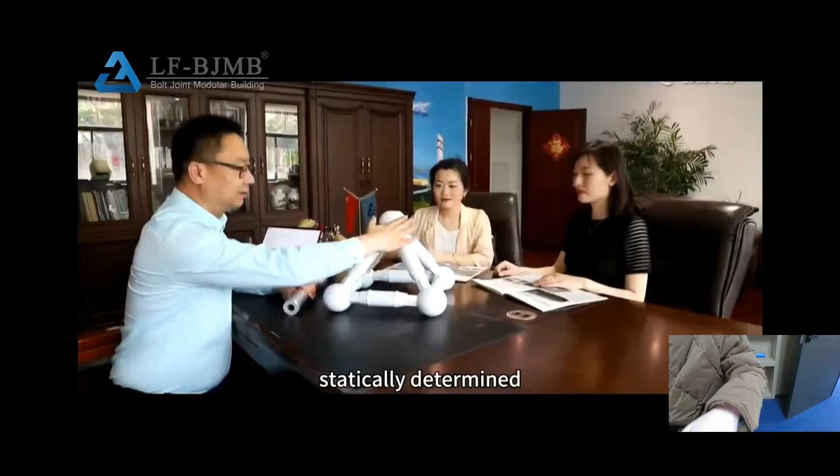Xuzhou LF specializes in serving overseas markets. The customers served are distributed in the Americas, Asia, Africa, Australia, and Europe. Overseas customers and projects include ThyssenKrupp, the Presidential Office of African Countries, the world's largest churches in Nigeria, Philippines SM, Shell Petroleum, Japan Mitsubishi, and BASF.

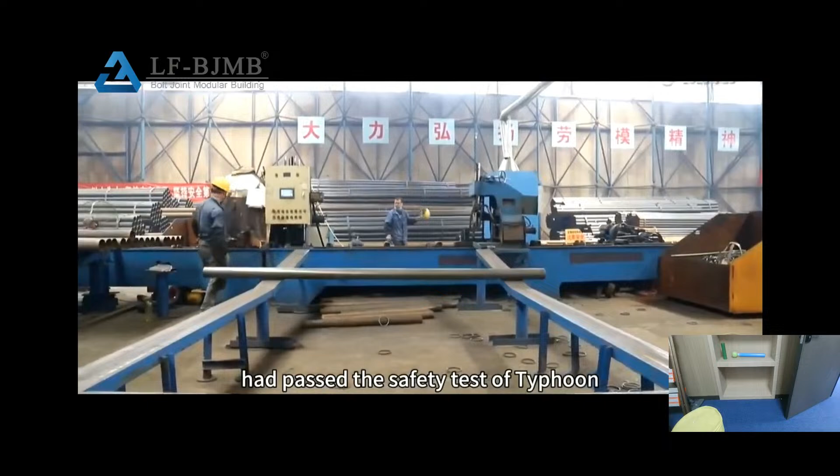Many large span coal sheds constructed by LF had passed the safety test of Typhoon Haiyan in the Philippines in 2013. LF has been carrying out technological development and R&D of steel structures and space frame with many patents.

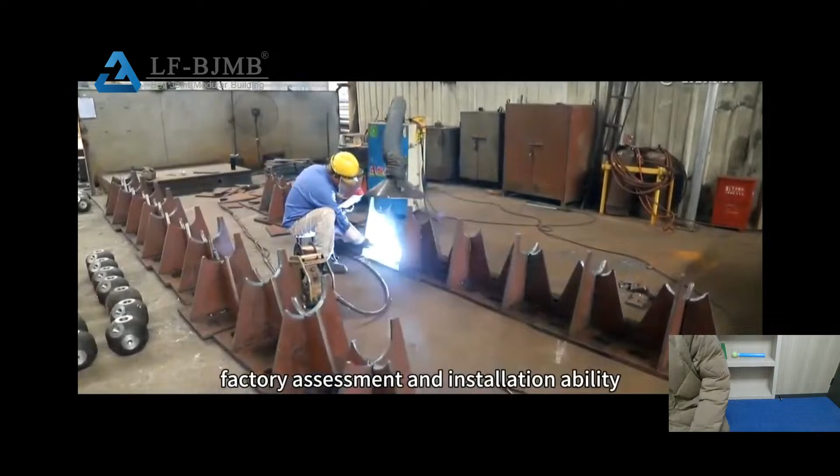LF has also been approved by some institutions like BV, SGS, AWS for manufacturing welding, technical assessment, international experience, factory assessment, and installation ability. It is recognized by Alibaba as a Strategic Cooperative Enterprise and Gold Seller for the Overseas Market.

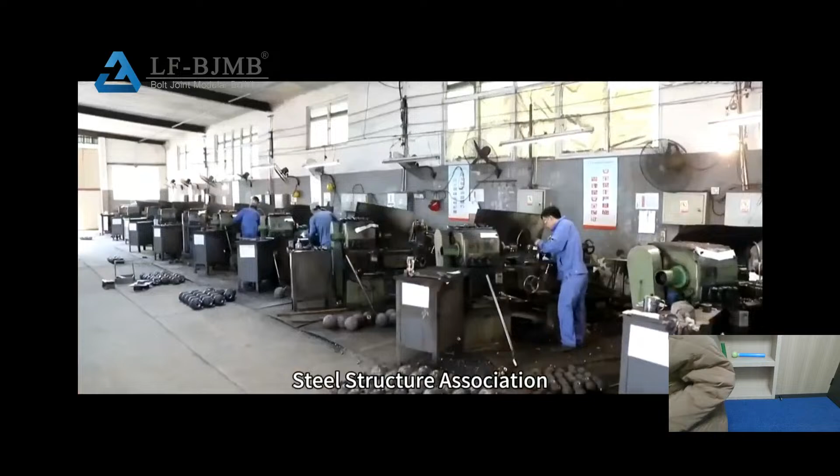LF also serves as board member of the China Steel Structure Association, vice chairman of Xuzhou Cross-Border Chamber of Commerce, vice chairman of Shenzhen Chamber of Commerce, and holds other social positions, leading Chinese companies to overseas markets.

The mission of LF is to make itself a respected leader in the steel structure industry, and let the customer choose LF without regret.

Now let's have a tour of our factory.

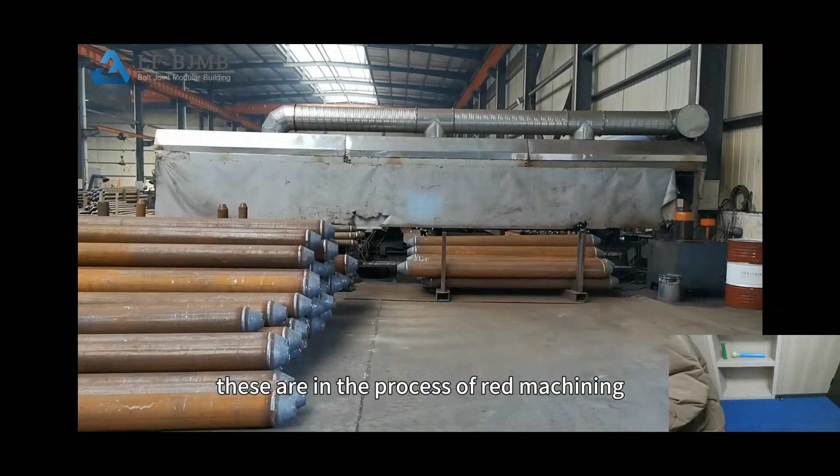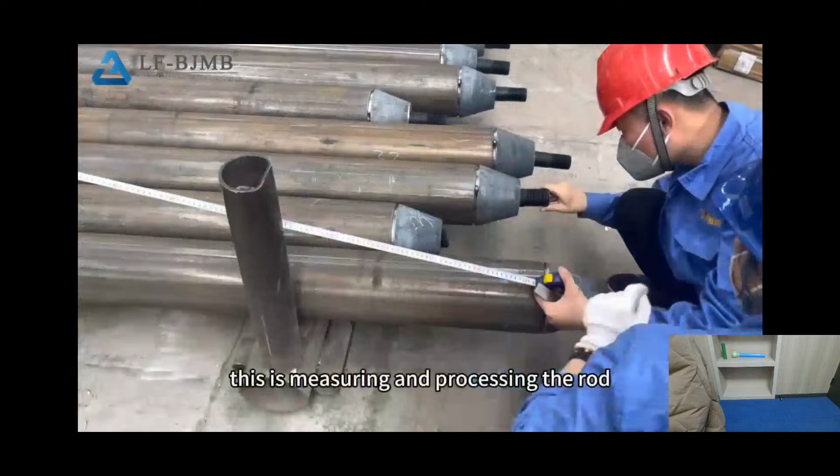These are in the process of red machining. This is measuring and processing the rod. Our process is strict to ensure the fastest speed to achieve the best quality.

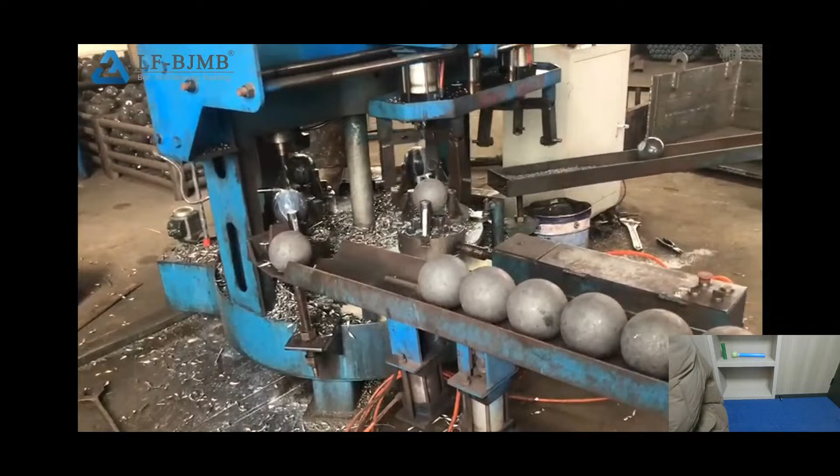Drill a base hole for the bolt ball. Then the bolt ball is machinized.

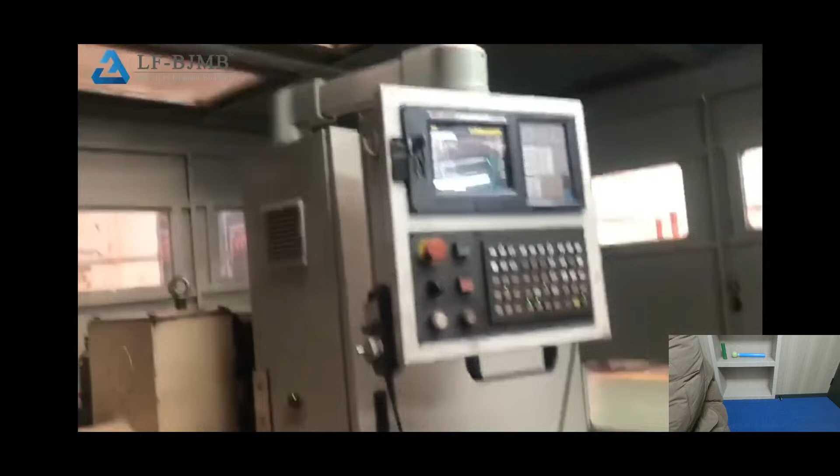The bolt ball is solid and the weight is very heavy, needing to be placed on the support with the aid of tools.

The bolt balls are sprayed with zinc to prevent corrosion.

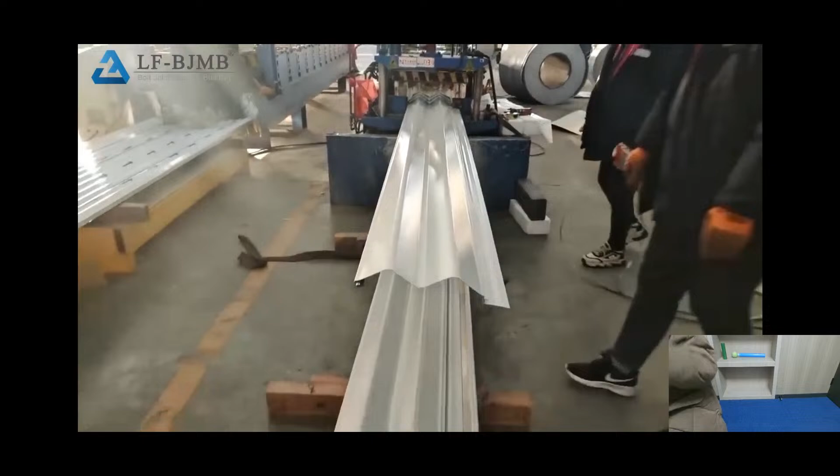This is dealing with sandwich panels. The process in our factory is orderly, fast, and quality guaranteed.

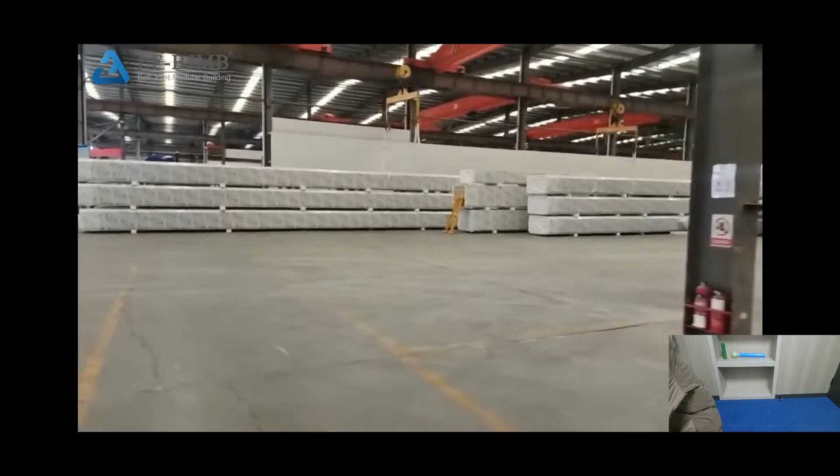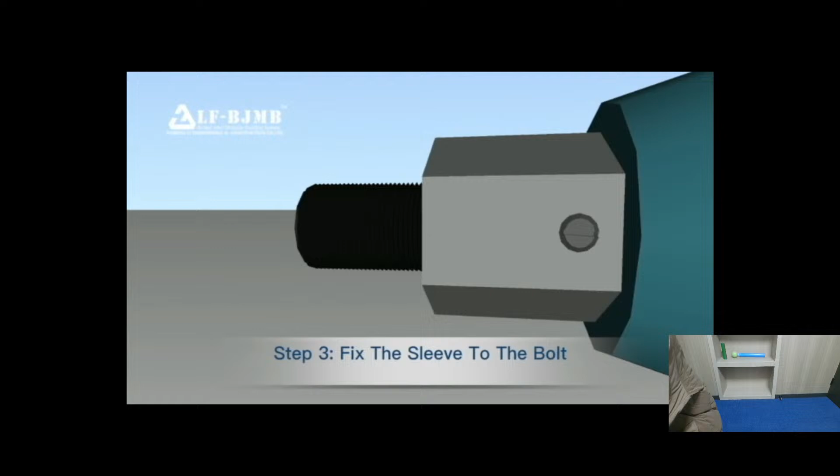This is followed by the space frame component assembly. Step 1: Put bolts into the pipe. Step 2: Fasten the pin to the sleeve. Step 3: Fix the sleeve to the bolt. Step 4: Connect the pipe to the ball by fastening the bolt. Step 5: Assemble the space frame module.

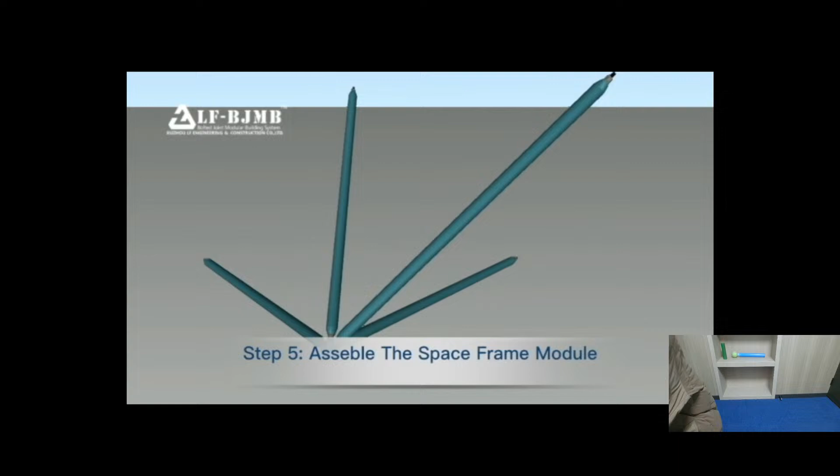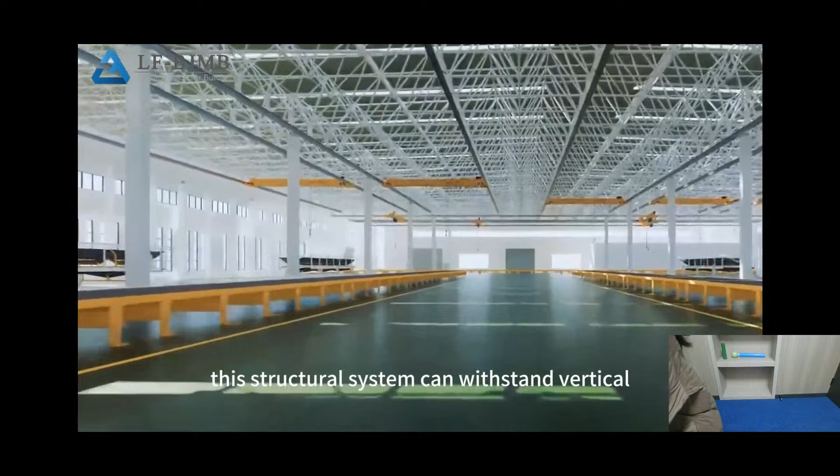The main structure of the space frame structure workshop is mainly composed of columns and beams connected through nodes to form a stable load-bearing system. This structural system can withstand vertical and horizontal loads, and the wall is not load-bearing, mainly playing the role of enclosure and separation.

A barrel shell is a shell with a barrel-shaped appearance or barrel-shaped structure. Shell is a kind of structural form with curved shape and thickness much smaller than other dimensions, which can bear large loads and has good stability.

This is the dome space frame structure coal bunker installation display. Dome coal bunker is mostly used in vertical large capacity coal bunker, and its structure can disperse the pressure evenly, so the stress performance is better.

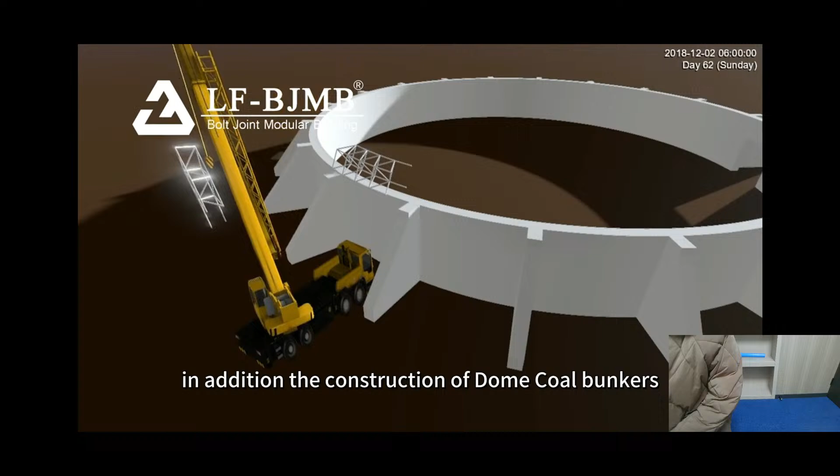The design of dome coal bunker makes full use of its internal space, with high section utilization rate, which can store more coal. In addition, the construction of dome coal bunkers is relatively simple, and due to its structural characteristics, it is also easier to maintain.

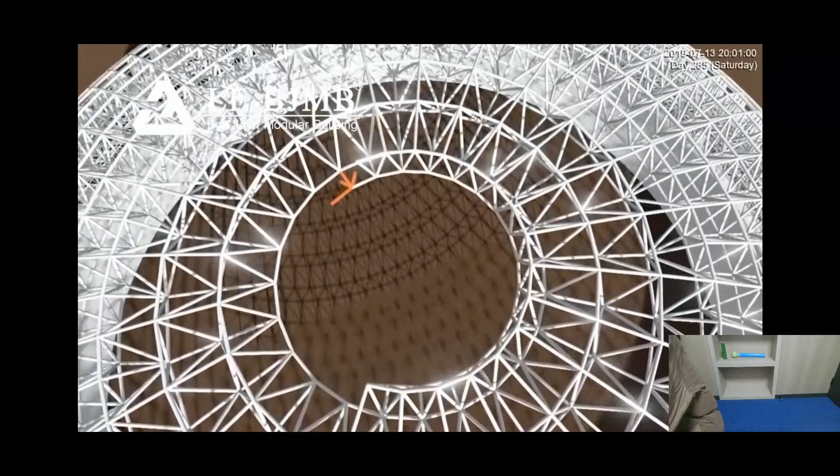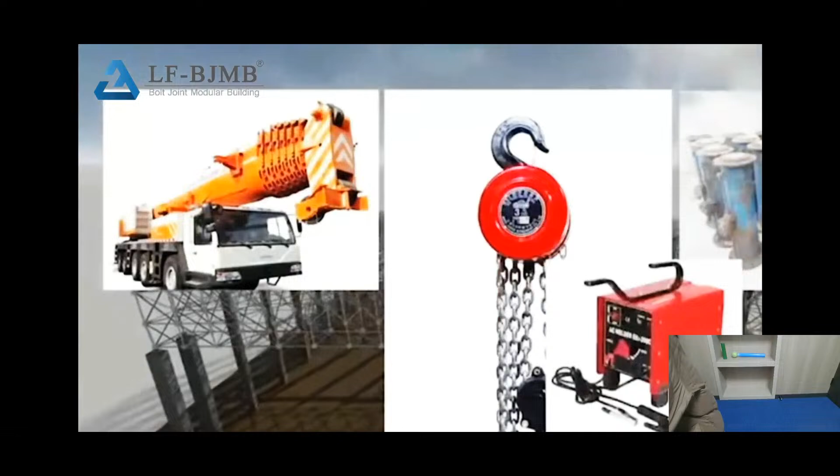This is the hangar space frame construction simulation BIM, showing main construction materials and construction quality specification.

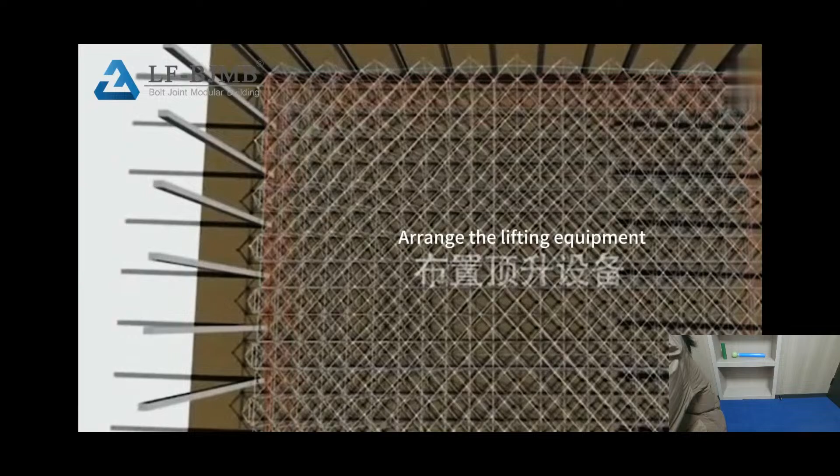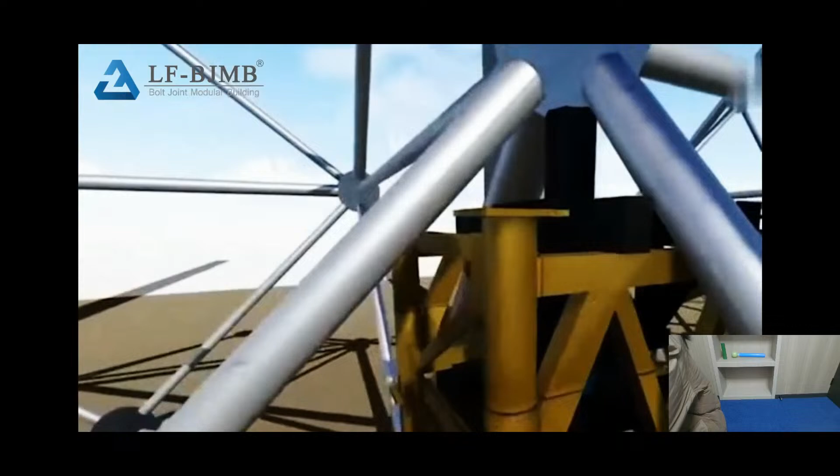Arrange the lifting equipment. Test lift work. Lift. Formal jacking.

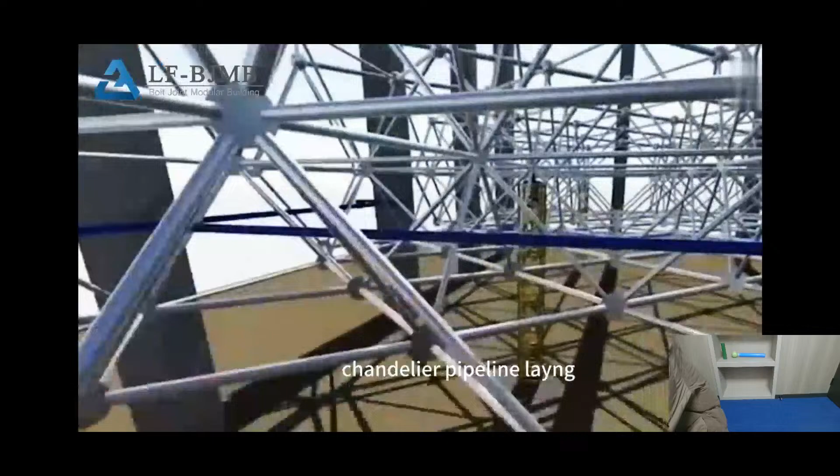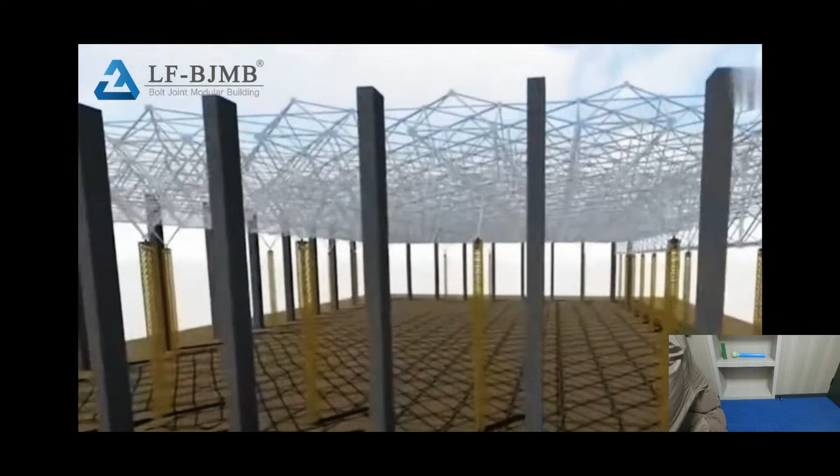Chandelier pipeline laying. Point of observation. Hangar space frame lift description.

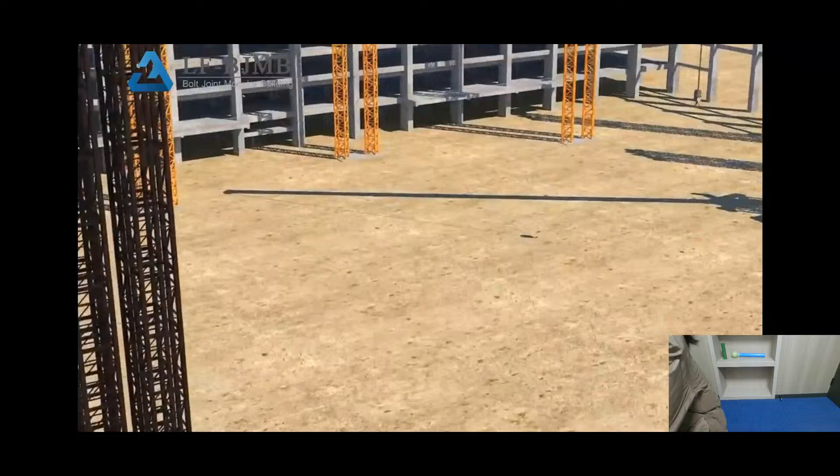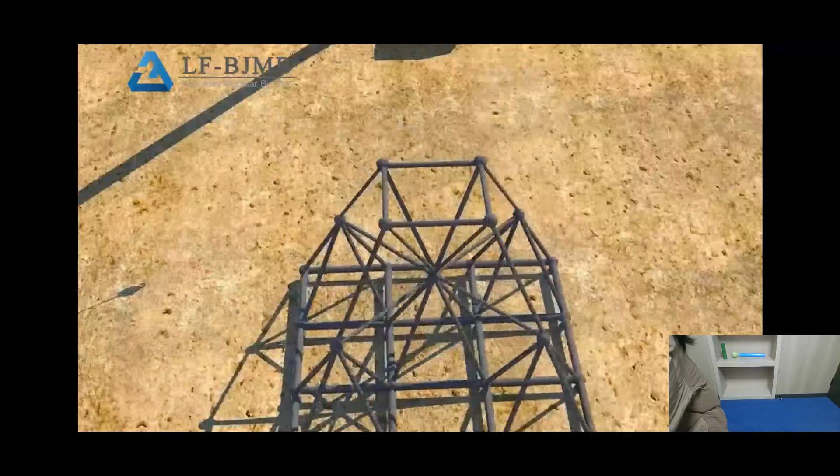Ground space frame assembly steps. Water and electricity installation, roof main purlin installation. Door head guide structure installation.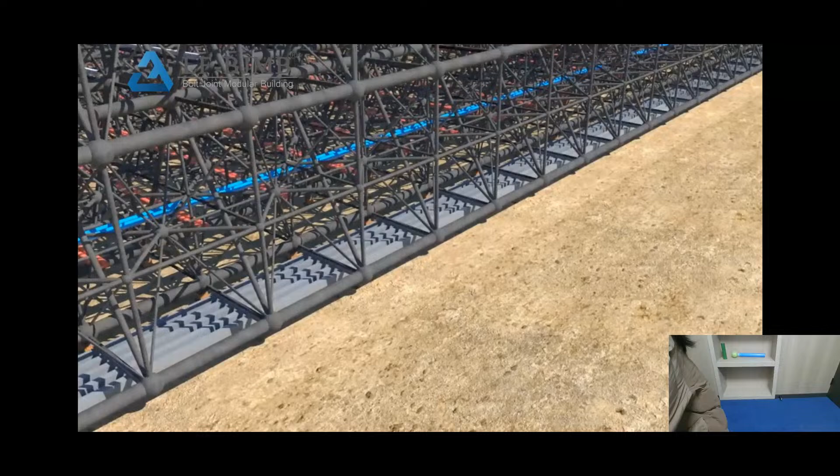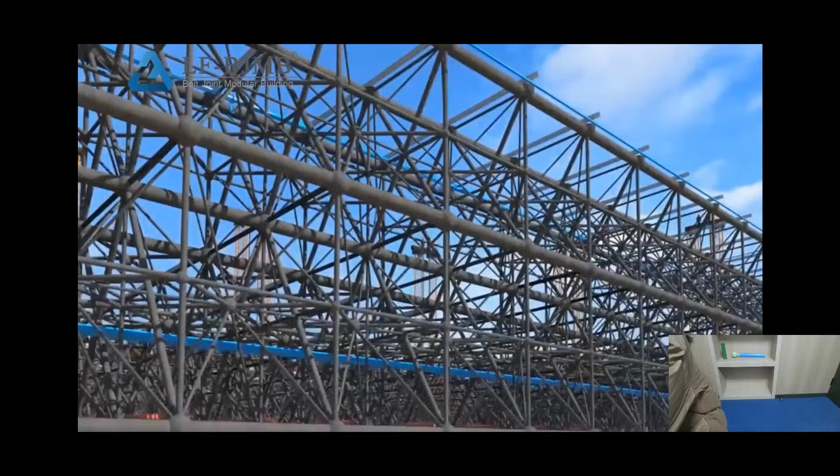3D laser scanning. Space framework pre-elevation. The space frame is officially lifting.

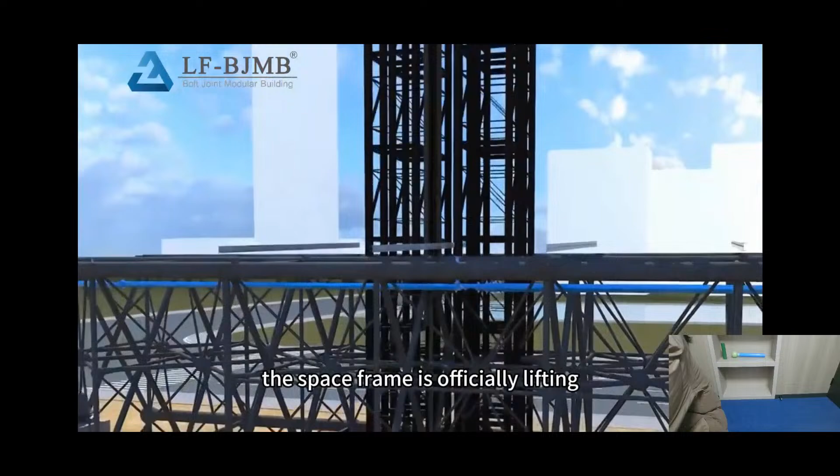Close-up bracket. Installation of horse path. Space frame disassembly.

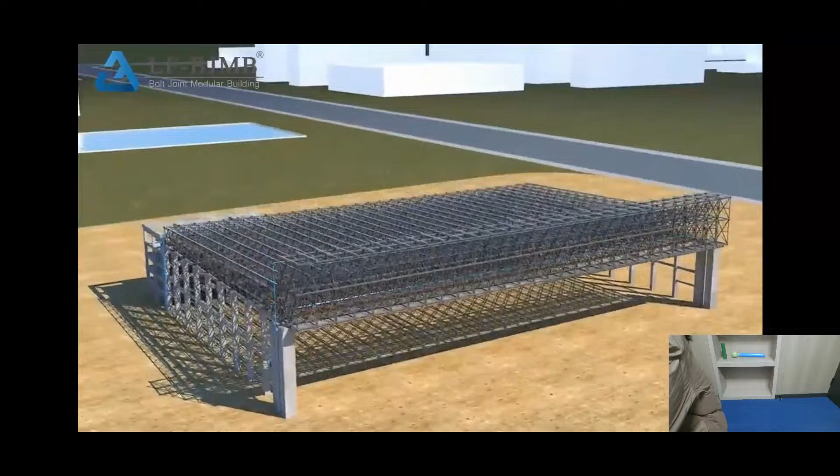This is a demonstration of the gas station shed roof installation process.

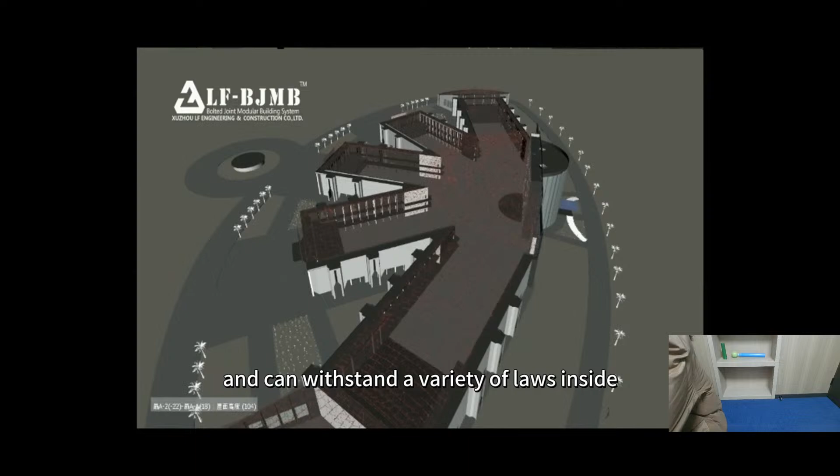The spatial framework of the cathedral is made of high-strength, corrosion-resistant steel. The steel has excellent mechanical properties and durability and can withstand a variety of loads inside and outside the cathedral, including spectator loads, wind loads, snow loads, etc.

At the same time, the plasticity and workability of steel also enable the spatial frame structure of the cathedral to achieve a variety of complex shapes and details.

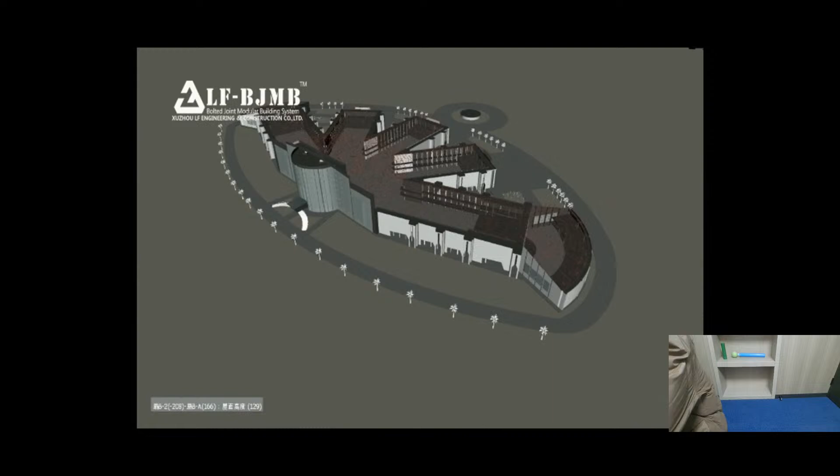The design of the space frame structure of the cathedral fully considers the safety, stability, and economy of the structure. Through accurate calculation and analysis, the designer determined a reasonable structural arrangement and component size to ensure the stability and safety of the cathedral under various loads.

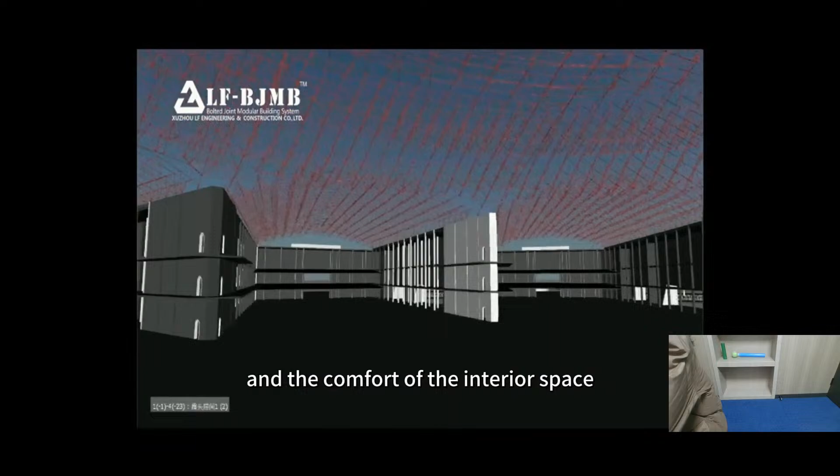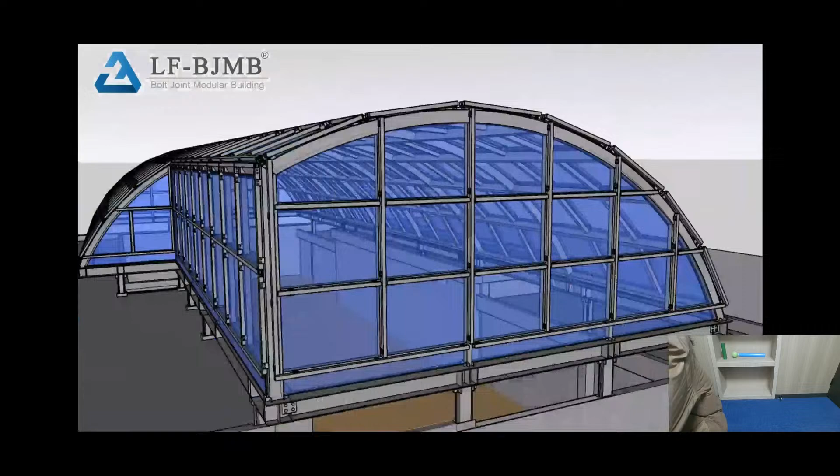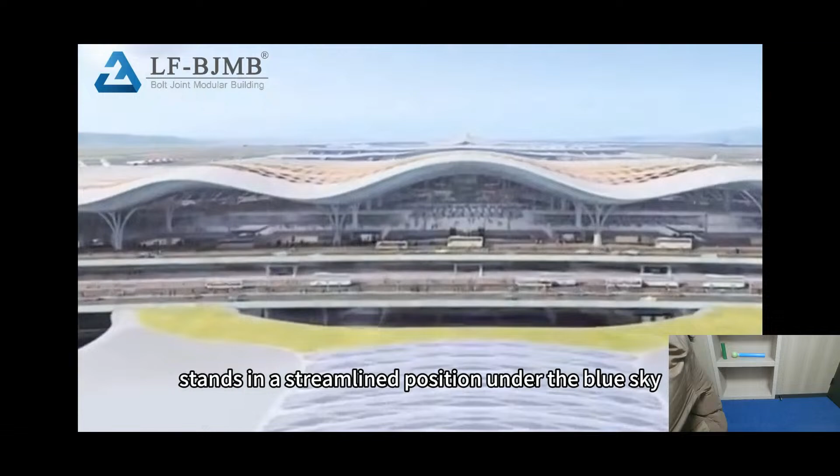The first thing you see is a spectacular panorama of an international airport in Yunnan province. The design of the terminal combines modern and traditional elements and stands in a streamlined position under the blue sky, like a phoenix with wings ready to fly, symbolizing the hospitality of the people of Yunnan and the infinite hope for the future.

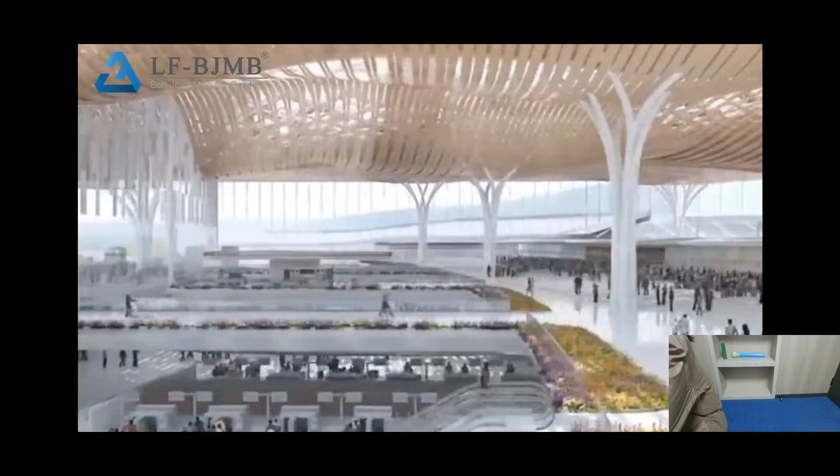Entering the interior of the terminal, a spacious and bright hall with a reasonable layout is displayed in front of you. The interior decoration is cleverly integrated into the ethnic customs of Yunnan. From murals to sculptures, every detail tells the story of the land.

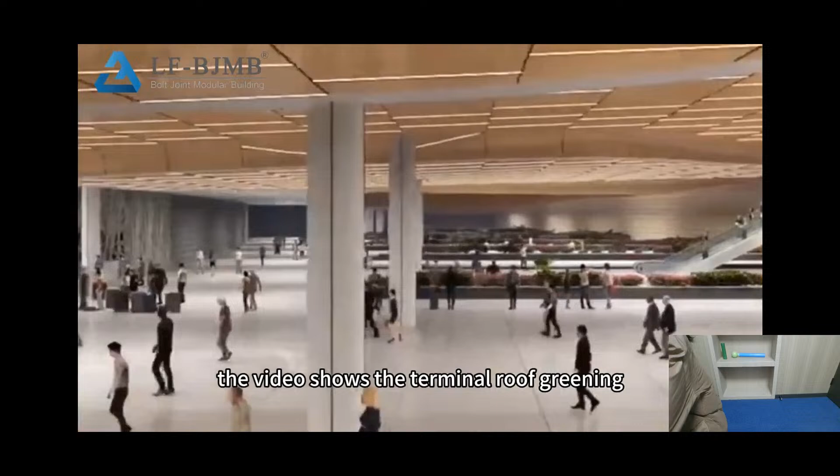Yunnan Airport terminal design pays special attention to green environmental protection. The video shows the terminal roof greening, rainwater recycling system, and energy-saving lighting measures, which not only beautify the environment but also effectively reduce energy consumption.

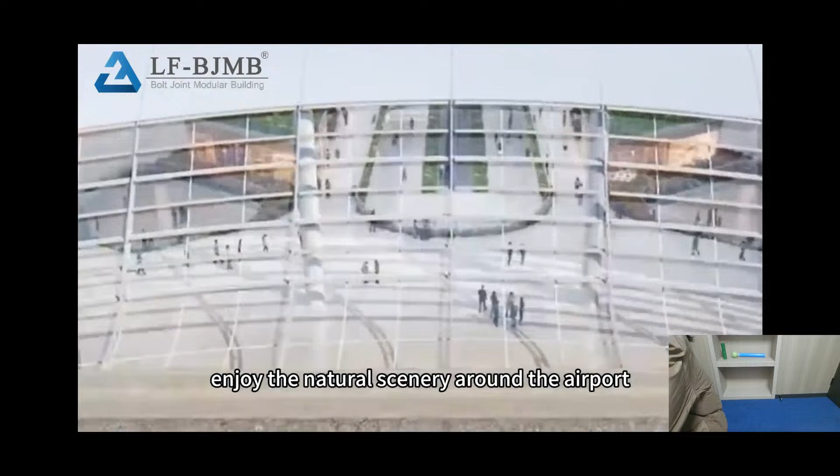Through the huge floor-to-ceiling windows, passengers can also enjoy the natural scenery around the airport, as if they are in a moving landscape painting. The lower structure of the terminal adopts a reinforced concrete frame structure.

The roof and supporting roof structure are hyperboloid shaped, and the quadrangle pyramidal space frame structure is adopted. The supporting structure of the roof is steel ribbon, conical steel pipe column, and variable section box swing column.

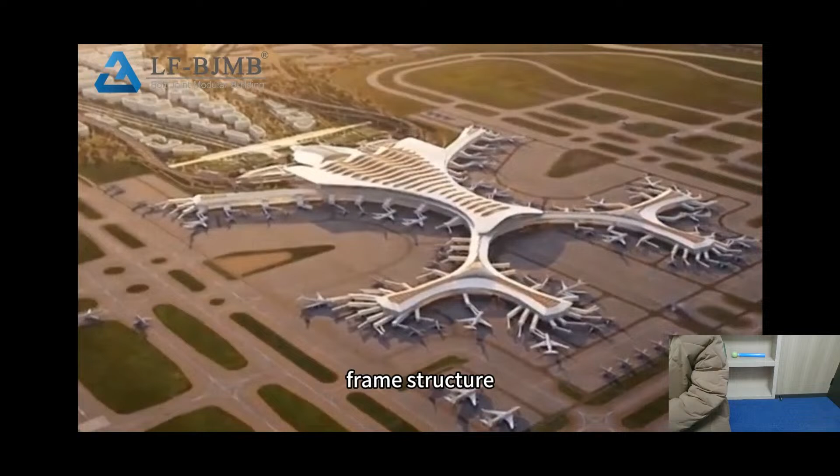Every departure is a new exploration, and every arrival is a yearning for a better life.

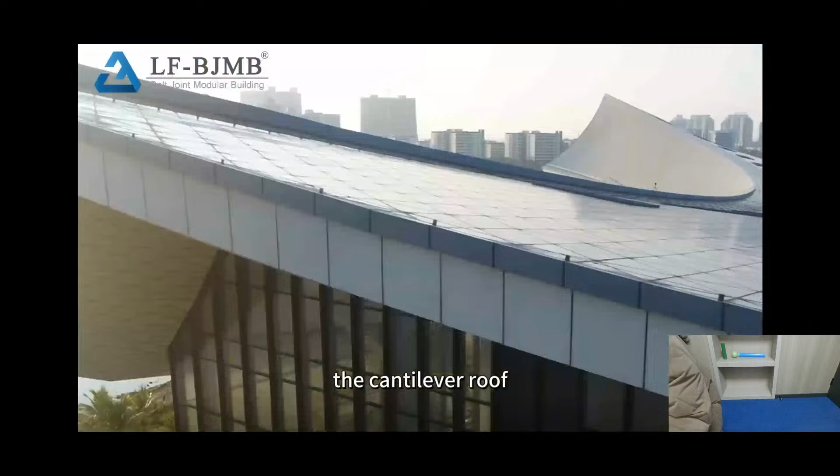At every step, you can feel the integration of history and modernity. The unique space frame design makes every corner of the museum full of surprises. The cantilever roof and the staggered beams and columns not only support the weight of the building, but also bear the crystallization of human wisdom.

Every detail is a profound interpretation of architectural art.

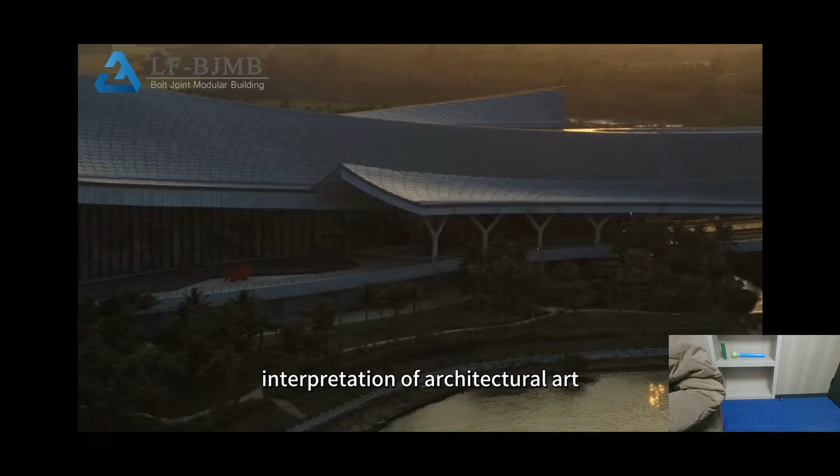The following shows you some steel structure space frame buildings. From blueprint to reality, each precisely calculated steel beam is a dual commitment to safety and aesthetics.

Each step is a quest for perfect structural strength. Engineers have calculated carefully to ensure that every inch of steel can withstand the most demanding competition tests.

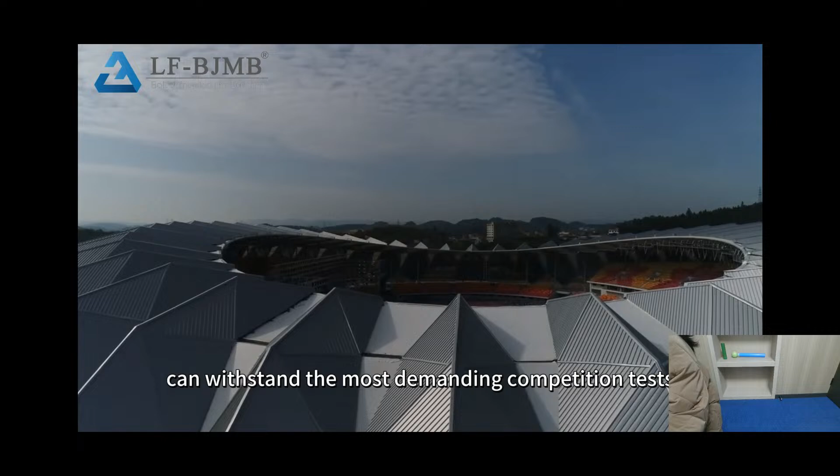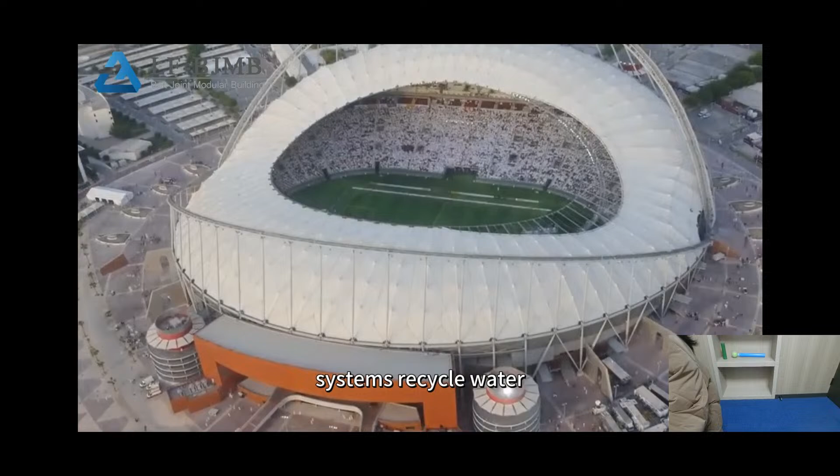Green energy saving is another highlight of the space frame gymnasium. Solar panels provide clean energy for the venue, and rainwater collection systems recycle water resources to protect our beautiful home planet. Inside, modern design and humanistic care are evident.

The playing field adopts international standards and is ready for every passionate encounter. Every detail shows respect for the spirit of sports.

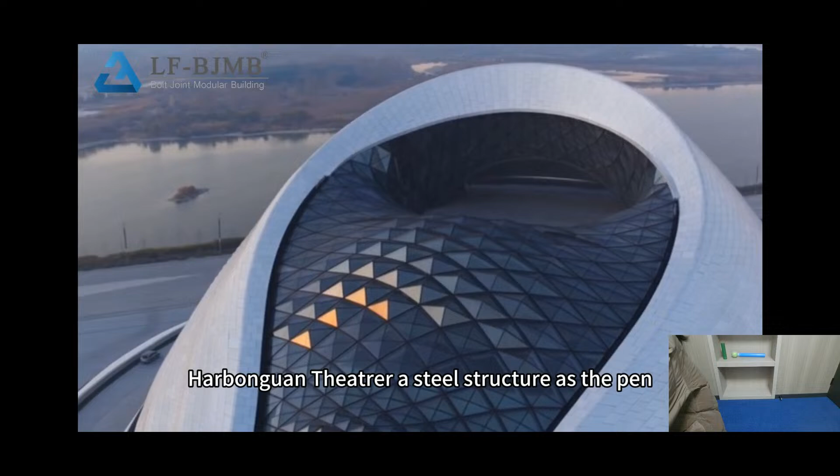Harbin Grand Theater: a steel structure as the pen, art as the ink, writing in the ice city on the land a magnificent poem.

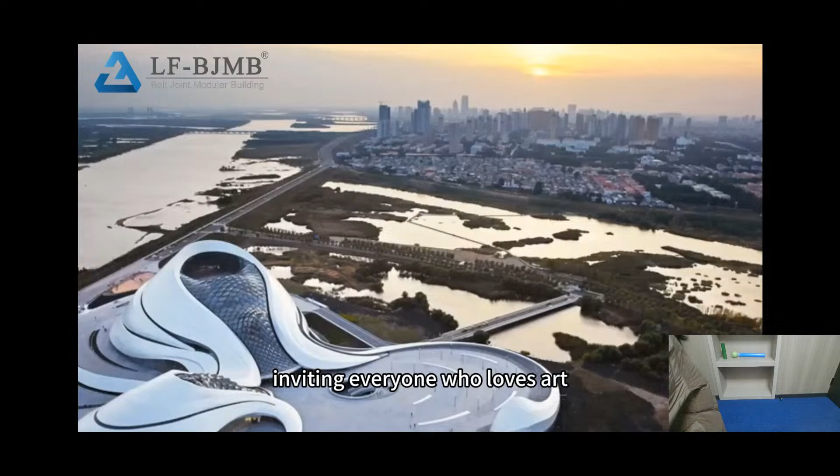It is not only the temple of performance, but also the habitat of the soul, inviting everyone who loves art and pursues dreams to witness every bloom of inspiration and feel every touch of the soul.

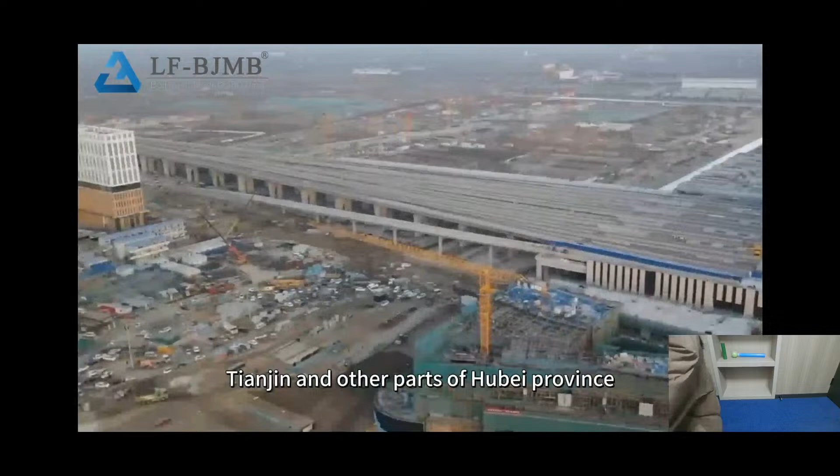Xiong'an High-Speed Railway Station is a comprehensive transportation hub integrating high-speed rail, intercity railway, subway, bus and other modes of transportation. In the video, it can be seen that the platform layers are staggered, and the high-speed train shuttles through them like a silver dragon, efficiently connecting Beijing, Tianjin and other parts of Hebei province, greatly shortening the time and space distance between the cities.

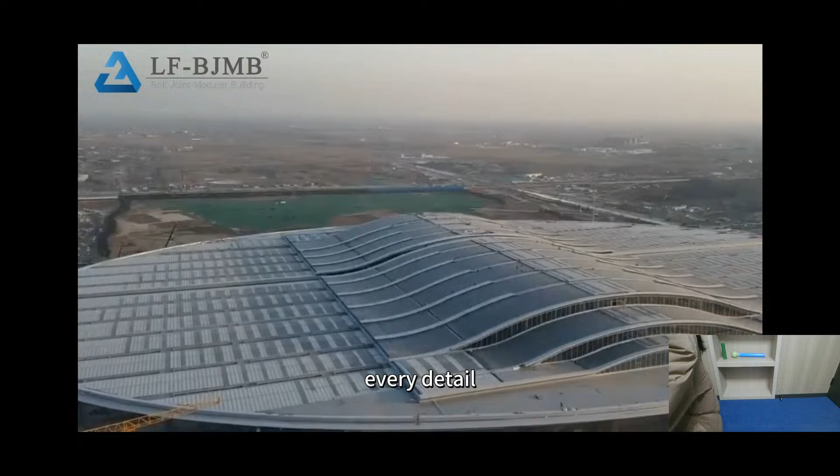The supporting facilities in the station are perfect, from intelligent security check, face recognition, to automatic ticketing and information query. Every detail reflects the humanistic care of science and technology, which provides great convenience for passengers.